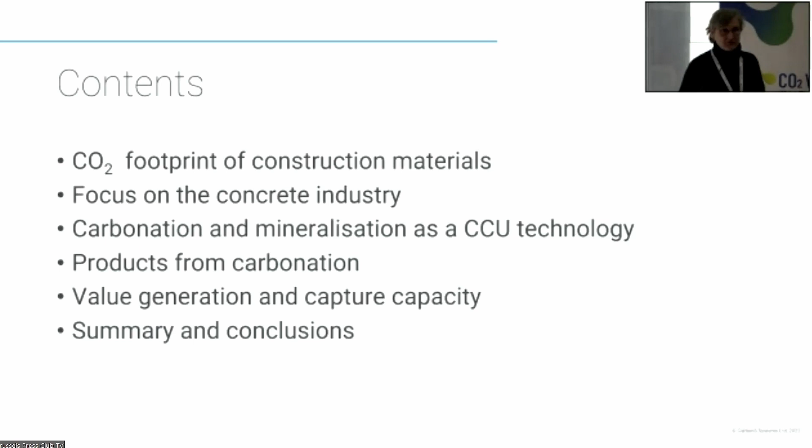So I've been invited to talk about the role of CCU in the building sector, and it follows on very nicely from the previous talk and the idea of mining. So we'll come back to that in a minute. So I want to talk about the CO2 footprint of construction materials. A very quick focus on the concrete industry, because obviously that's where we can make the most impact in terms of CCU. Talk about carbonation and mineralization as a CCU technology. What products can we make, how can we generate the value, and what's the sort of capture capacity that we can envisage for carbonation and mineralization.

Whoops, too quick. So the carbon footprint of the construction industry. It's something that we're not going to get away from very easily, because we have increased urbanization, and you just look at that picture of New York and you can see the amount of different building materials that are in use. Principally concrete, so hence the emphasis on concrete, but also the huge amount of steel, brick, and then aluminium that goes into our global building materials.

It was very difficult to find any data on actually what the carbon impact of the construction industry is. So I've got figures there from 11 to 38%. I think it depends on how you look at it. I think it's 38% of the energy related emissions, but overall the emissions are probably a bit lower than that if you take the whole package. But the cement industry themselves admit to between 7 and 8% of all global carbon dioxide emissions.

So you can see we've got different sorts of point sources that are dominating the carbon dioxide emissions. Cement plants are not generally near where there are networks for CCS. They are isolated plants because they're determined by the geology rather than by urbanization. And then there's the classic picture that Al Gore used of the brickworks in India, where you're producing not only particulates that are polluting the Taj Mahal, but you're producing a lot of CO2 and eroding the soil in a totally unsustainable way of producing building materials.

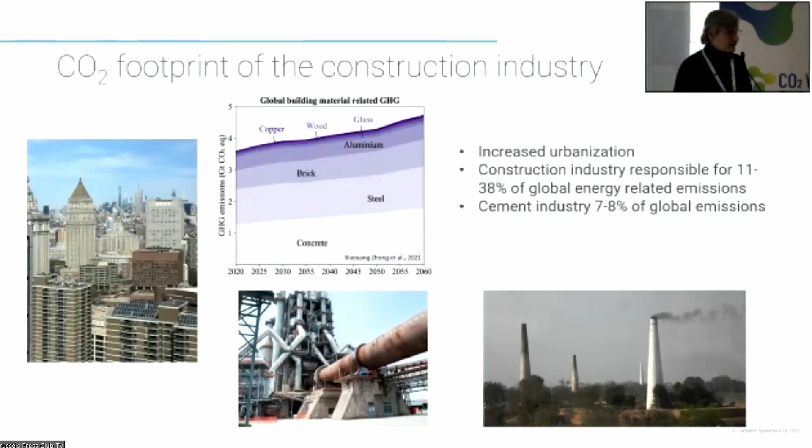So the carbon footprint of concrete: in about 2018, the MPA published a figure that 1 ton of concrete produced 72 kilograms of CO2. But they were very proud to announce that that was a reduction of about 30% on the 1990 figures. Just for comparison, glass has a footprint of 3 tons of CO2 per ton of glass. I'm not going to talk about how we can do anything about the glass industry. It's a real challenge because it's a thermal process.

There's been an awful lot of work on trying to reduce the CO2 in the cement component of the concrete. So if you think of the embodied carbon dioxide in the concrete, about 75% of it is due to the cement. And that has reduced by 30% over the last 30 years by the major changes that the cement industry are making. A lot of that is driven by the Global Cement and Concrete Association, and they have a roadmap just recently published, which involves 6 different elements.

Replacing the fossil fuels in the kilns. So instead of burning coal and gas, move to alternative fuels, including refuse-derived fuel and indeed hydrogen. There's one plant in the UK that has trialed the use of hydrogen to fire their kiln, unfortunately in conjunction with other fuels. Changing to renewable energy for the other energy requirements of the plant. Deploying carbon capture at scale, well, they're going to have a problem because what are they going to do with the CO2? Because the cement works tend to be dispersed sites.

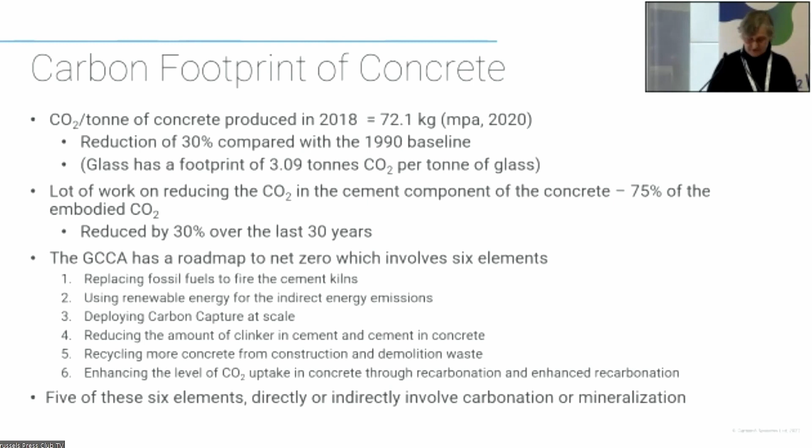But suddenly the concrete industry all said, oh, well, let's encourage the CO2 into that concrete. But we have to be very careful with that. Anyway, I can argue that 5 of the 6 elements that the GCCA have proposed are directly or indirectly related to carbonation or mineralization. So what is it? It's a natural process. And I think that's really important to talk about, because it's a very low energy form of CCU.

In nature, calcium and magnesium ions, generally dissolved in the ocean, are converted to limestone or dolomite through absorption of the CO2 into calcium carbonate. So fossil plants and sea animals are very efficient at converting that CO2 into calcium carbonate. And that calcium carbonate lasts for millions of years. So I've put up an example. This is the White Cliffs of Dover, Cretaceous. I'm a geologist by training, so I like to put up pictures of rocks. So the Cretaceous, a few 100 million years old. So it's been around for an awful long time.

And we've used limestone or marble, which is the same thing, extensively as a building material. And there, because I've got an Indian theme, I put the Taj Mahal up. Here's a beautiful example of a marble building, which is quite old. It's been there without too much damage, except for the brickworks down the road who are producing particulates that are changing its color. So there's a very strict regime. You can't have brick making too near the Taj Mahal.

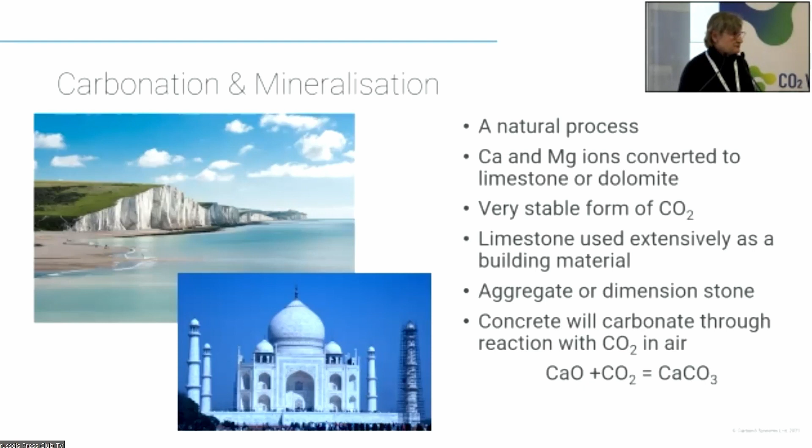So the concrete itself will carbonate naturally through reaction with CO2 in the air. And it's a really simple reaction. CaO plus CO2 gives you calcium carbonate. So that reaction that takes millions of years in the geological context can be accelerated if you just increase the amount of CO2 that you've got in the environment, or you manipulate the environment a bit. You put a bit more moisture in, or you change the pressure conditions.

And people are doing carbonation at high temperatures and pressures, and in wet carbonation with a lot of water or with only a small amount of water. So there's a variety of different ways of doing carbonation. But basically it's the same reaction as going on in nature. Calcium and magnesium oxides, silicates, hydroxides can be forced to react with the CO2 to form carbonates. And you can use those carbonates to bind the materials together or produce other sorts of products.

So these minerals can be found in natural environments, particularly basic and ultrabasic rocks, so basalts, serpentinites, and dunites. You see, I'm a geologist again, I like to throw these rock names out. But also, more importantly, particularly if we're talking about circularity, you can find those minerals in a range of industrial thermal residues. So steel slags, ashes from energy from waste, cement and concrete residues, etc.

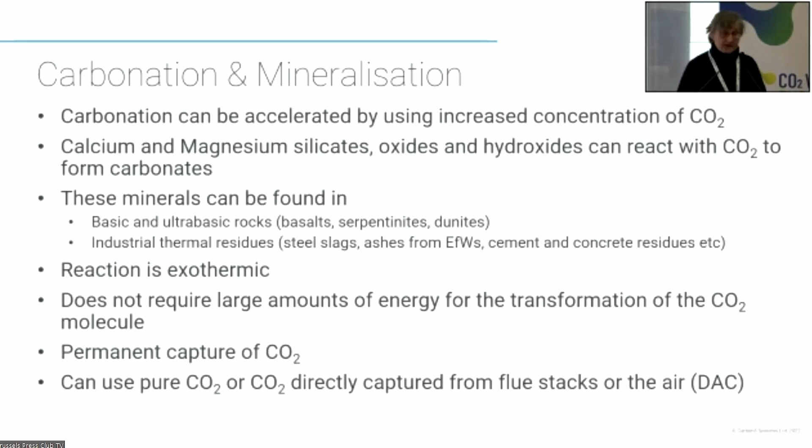And you can use both pure CO2 and directly captured CO2 from either flue stacks or from direct air capture plants. You don't need pure CO2. And you can make lots of different products that admittedly tend to be in this low value but high volume market. And that's quite an important thing because you're not distorting the market when you're making these products. So if you make aggregate from residues, it's entering a huge market, and you can design your aggregate to fit into a niche market. So you're not causing problems within the general aggregates market.

But just listing the different products, we've got supplementary cementitious materials. These are the things that are replacing the clinker in the cement, so lowering the overall carbon footprint of the cement. We can make cements that don't hydrate but carbonate. A lot of work has gone on in making concrete blocks where the strength is derived from carbonation rather than hydration of cement. And then the world that I live in at the moment, which is making aggregate using the calcium carbonate to cold bond manufactured aggregate for a variety of construction applications.

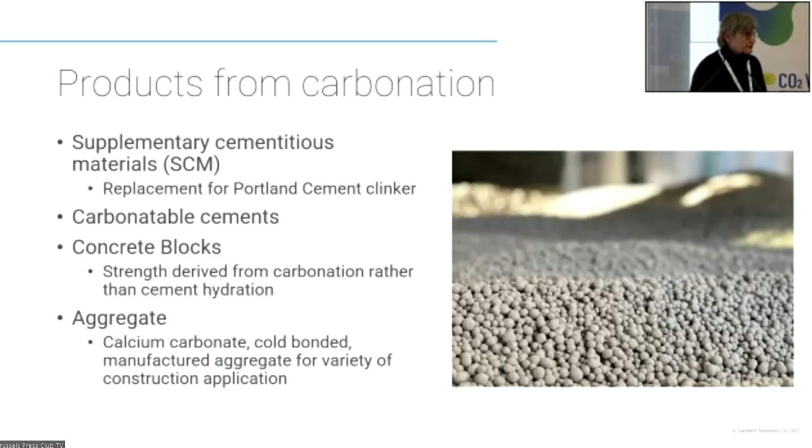So just quickly about supplementary cementitious materials. There's an awful lot of work going on at the moment trying to look at construction and demolition waste, because if you think, you knock down a building, it's like having an urban quarry. So you've got a lot of material readily available.

Several projects have been using the C&D waste to make SCMs, partly driven by the fact that our other SCMs are diminishing. We use extensively PFA from coal-powered power stations, and also blast furnace slag have been used in cement for a long time and have important properties in the cement. But if you carbonate the calcium silicates in the cement, you can produce both a calcium carbonate and a silica phase, which provides a limestone filler and what's called a pozzolan, which helps with the cementitious properties of the overall cement.

So as I say, there are various European projects, and a lot of the cement industry have got interested in using C&D waste. I've put CarbonCure in here. CarbonCure is a very good example of a company that's widely expanding, particularly in North America, where it's like a supplementary cementitious material in that they add CO2 to fresh concrete as it's poured, which, although they don't use an awful lot of CO2, it enhances the hydration of the cement, speeds it up, so that you can use less cement for the same strength.

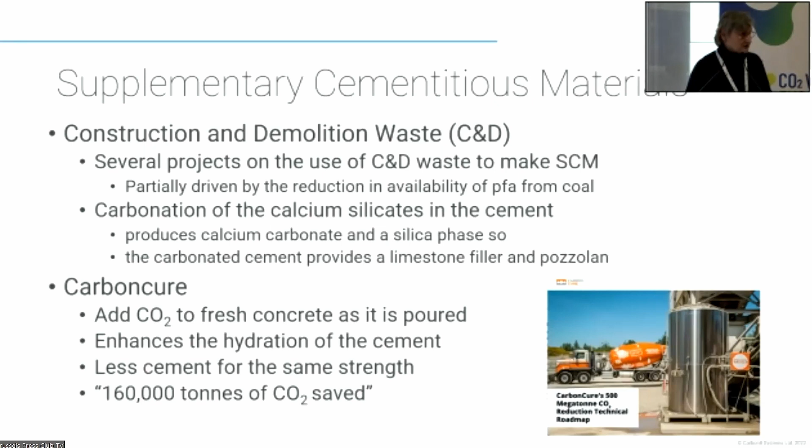And they say over the last 4 years of their operation, it looks fairly modest at 160,000 tons. But if you think at least 50% of that is in the last year because of their expansion, I think they have great potential, because every cement truck or concrete truck could have CO2 fitted to it.

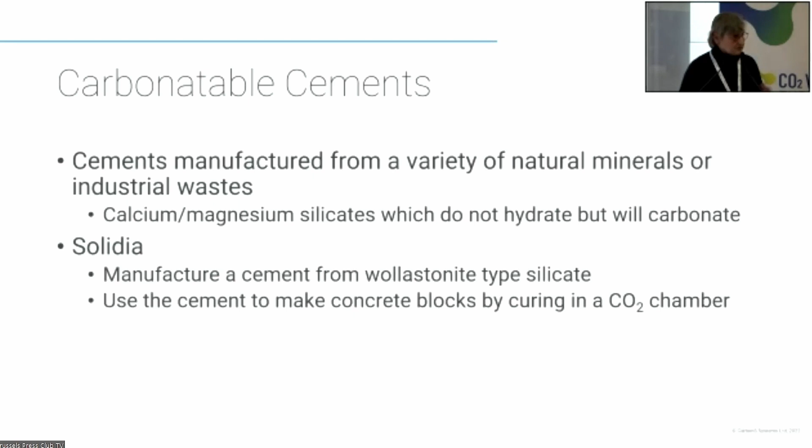So carbonatable cements, manufactured from a variety of natural minerals, or sometimes the industrial thermal residues that could be used. So these are producing calcium and magnesium silicates, which don't hydrate, but if you mix them with both water and CO2, they can go hard and cement materials together. Probably the most famous of those is Solidia, again in North America, where they're manufacturing a cement from a wollastonite type silicate. And they're using that cement to make concrete blocks by curing at relatively high temperatures and pressures in a CO2 chamber.

Then the whole field of concrete blocks, a lot of companies are using steel slags, particularly the calcium silicates in steel slags. You can form that into a block, cure it at high temperatures and pressures, and make very nice concrete blocks with no Portland type cement in at all. And Orbix, already mentioned, a spin-out from VITO, and there's CarbiCrete in Canada as well as a number of other companies looking at the use of steel slags.

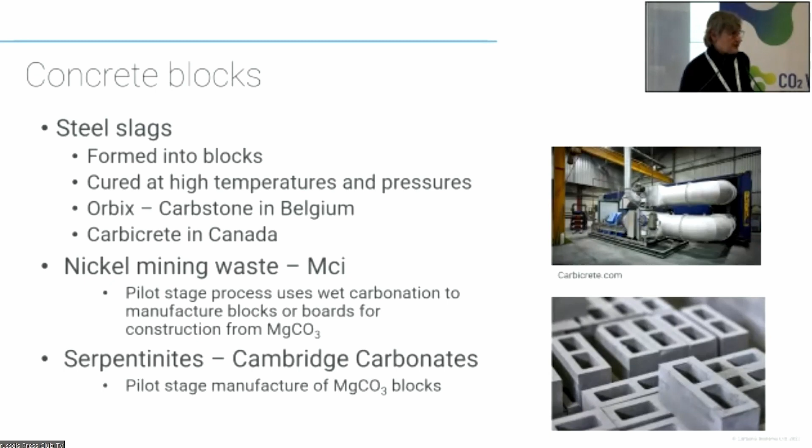Going on to mining waste, MCi using mining waste to extract the magnesium and make blocks or boards from magnesium carbonates. And then there's serpentinites where Cambridge Carbonates are again manufacturing blocks.

So in the aggregates field, again, people using C&D waste because of it being in abundance, and Blue Planet in the USA extracting the natural aggregates and sand from the construction and demolition waste, and then solubilizing the calcium ions from the cement fines and precipitating calcium carbonate to make nice limestone, what I would call ooliths or rounded aggregates.

Similarly, neustark in Switzerland are doing that, and they are the first company to earn methodology approval for removal certification in the voluntary market so that they can actually get value out of the CO2 that they're capturing. And they say that they can have concrete with a 10% improvement in the carbon footprint.

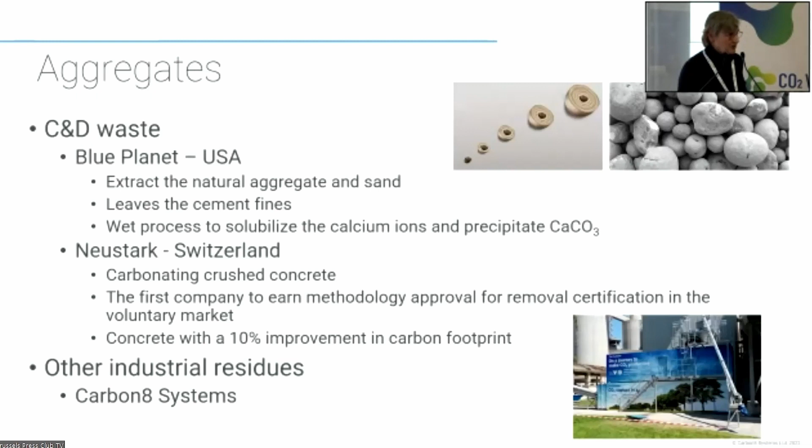And of course, I must mention us, Carbon8 Systems. We're treating a whole range of industrial residues. We're using flue gas derived CO2 directly to make an aggregate. Again, it tends to mostly go into concrete blocks, but it has some other applications.

I'm sorry, I'm overrunning, am I? Okay, that'll be very quick.

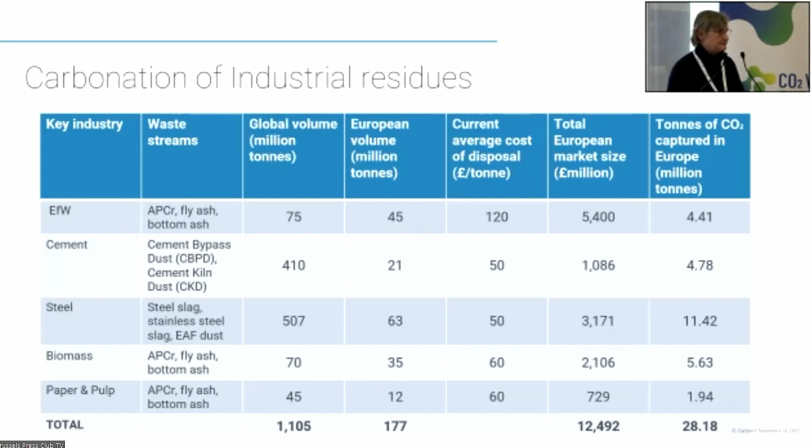Just to think about the value and the quantities, the vital bit is underneath the label at the bottom there. If you took all the residues in Europe, you've got about 28 million tons of CO2 that can be captured per year in Europe. That's the amount of residues over 1,000 million tons globally in these just 5 different thermal processes. So the value of that in terms of market size is 12,000 million pounds. So it's a good commercial enterprise. There are many companies that are already fully commercial, TRL 9, and those companies have had major investments over the past few months and recognized in that voluntary carbon credits market.

An important thing, we can permanently capture gigatons of CO2 in a value generating process. So to capture a ton of CO2 in our process, you can make €200 rather than it costing you. Products tend to be low value, high volume, lots of growth, and we must be looking at environmental product declarations and LCAs to prove the carbon credentials of the materials, and those things that we need to do as well.